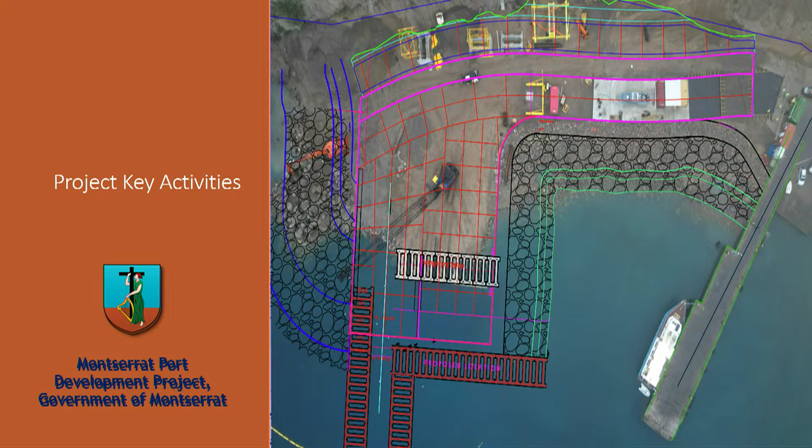Our next photograph highlights the ongoing construction, and you can see there is already a lot of work done in completing the causeway and the road access. And this is an aerial shot where you can see the permanent caissons that are making the formation for the RoRo ramp or the roll-on and roll-off facility that is being formed at the moment. And then to the seaward side, there is the construction of the coastal protection.

I just want to speak a bit on the caissons. These are large concrete blocks. On the table here, there are some 3D models that have been printed, so later on after the meeting, you can have a look. It gives a better idea as to what actually is being constructed. But this is an underwater photograph that highlights the caissons being put in place to form the RoRo ramp.

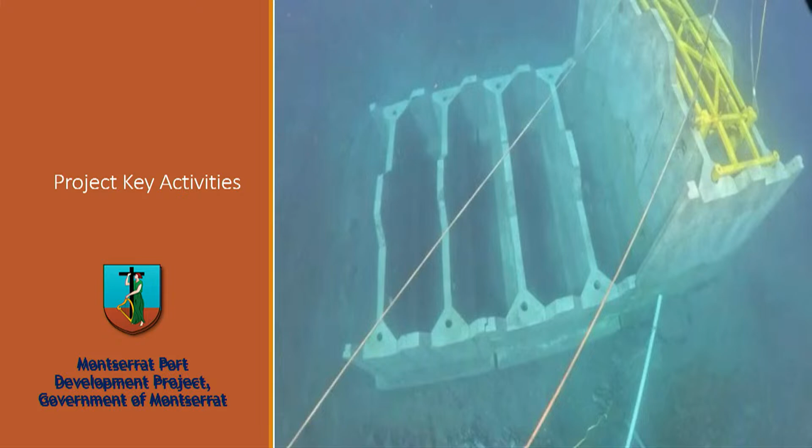Caissons are being constructed, they are being precast at the Piper's Pond facility. And to date, the contractor have completed just about 80 caissons. They have reported they have completed the required amount to construct the RoRo ramp, but the total requirement is about 324 thereabout, plus what is required for the Dolphin. The Dolphin would take on a different configuration, but will be done with the precast caissons as well.

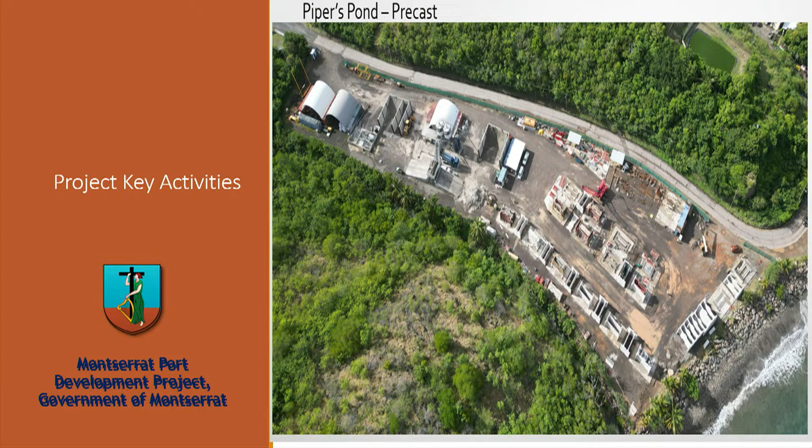So the photograph highlights, and I know a lot of us been driving along the Piper's Pond in the Carr's Bay Little Bay area, and you can see through the fence the construction that is ongoing. Next, I'm gonna show a video highlighting how the caissons are removed from their base after being precast. And usually it should take about 3 days for them to remove formwork and then storing the caissons.

The caissons are built on what is referred to as a kicker, and it takes the various trapezoidal or triangular shape that allows the caissons to fit together. So in my hand, I have the 3D printed models, and if you notice, there's a trapezoidal shape, and so the formworks are prepared so that each caisson can have that. These are called keys that allow the caissons to fit together in a manner that they would be very stable when they're fitted together.

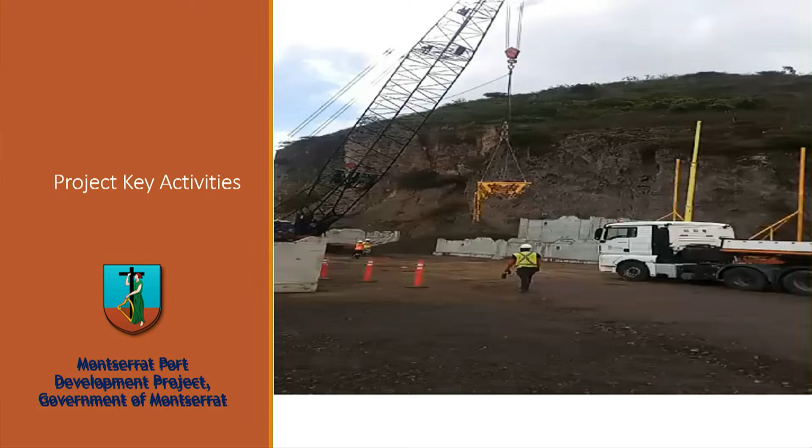So there you see the crane would have lifted the caisson from off its platform, and it has the ideal shape that is required for construction. The caissons are then transported out to the main construction area onto where the pier is being constructed. This is using a lorry, and some of us may have had the opportunity of seeing these being transported, and I just wanted to highlight this in terms of the whole traffic management process that is in place.

Usually, once they're transporting these around from Piper's Pond into Little Bay, traffic is diverted up to the cultural center and down to the port, or from the port up to the cultural center. While the lorries are going through the port gate, there is always someone in place to control the traffic so that these are transported in a safe manner and we don't have any incidents. So far, it's been working pretty well, and we have been highlighting this in our media so that our folks are aware of what is happening.

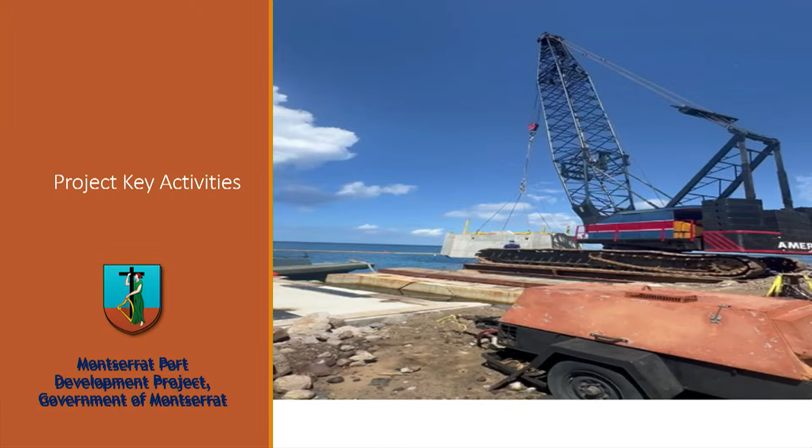Once the caissons have been transported out to the causeway or the main construction site, the main crane, the bigger size crane, is used to put them in place, and you would have seen in the underwater photograph previously where these are being placed underwater. There are numerous other machinery which allows them to be placed accurately, including the surveying instruments. You would see some large towers. Because it's underwater, they're using these large towers with the prism at the top that would allow them to place the caissons correctly, ensure that they're level and that they are aligned as they should.

There's some other machinery which is called the stone spreader, and it's similar to a road paver, and it is used to place the bedding material which the caissons are being laid on, and compact that material. All of this machinery operates underwater.

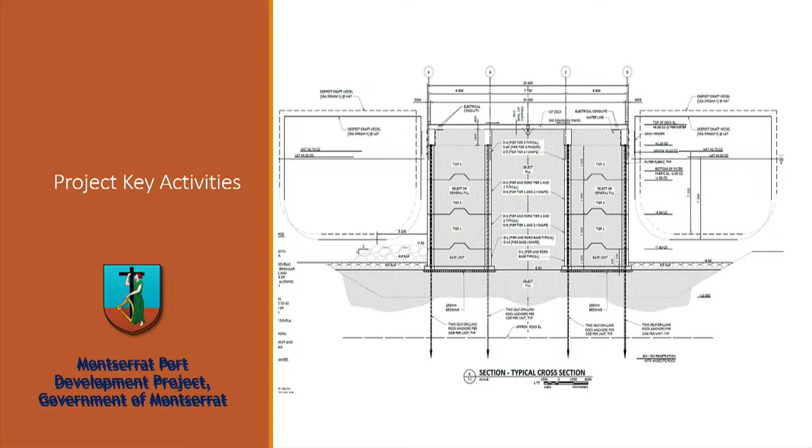Previously, we have had questions as to how we are ensuring that the caissons are stable and well in place. As part of the designs, the designers have been using what we call the rock anchors, which are some very large steel bars drilled down into the seabed, just over 5 meters, I think, thereabout. This is about 15 feet or so, which is part of stabilizing the entire structure. Apart from that, the caissons are being filled with materials to ensure that they don't move under the sea conditions, and we know what sort of sea conditions we are dealing with.

So you can see the lines. These represent the rock anchors, and they go from the seafloor right up into the caissons. When they're precast, each caisson is constructed with a circular void, which allows us to embed those rock anchors, and it's also filled with a grout material that hardens and makes the rock anchors become one with the caissons.

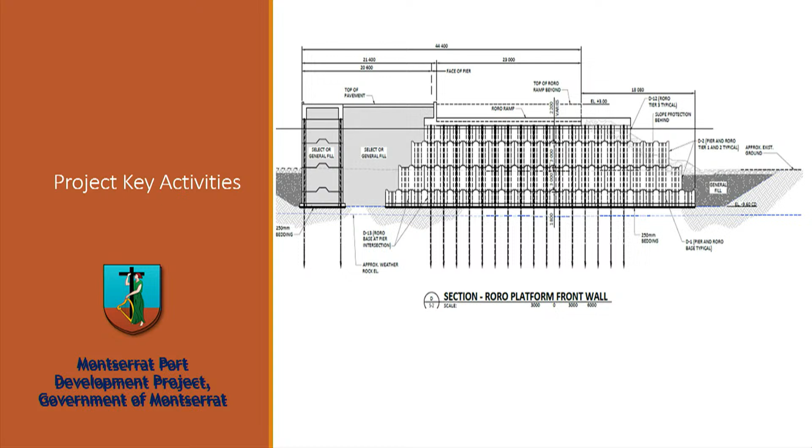Just to give you an idea of what those steel bars look like, and this is just a sample, it's not the full length. They actually operate with couplings where they're joined together. The machinery is also on island, the drill rig, which allows the placing of these steel rods into the seafloor. So that machinery is on island, is operational, and soon enough, along with those caissons that have already been placed, they'll be putting in the rock anchors.

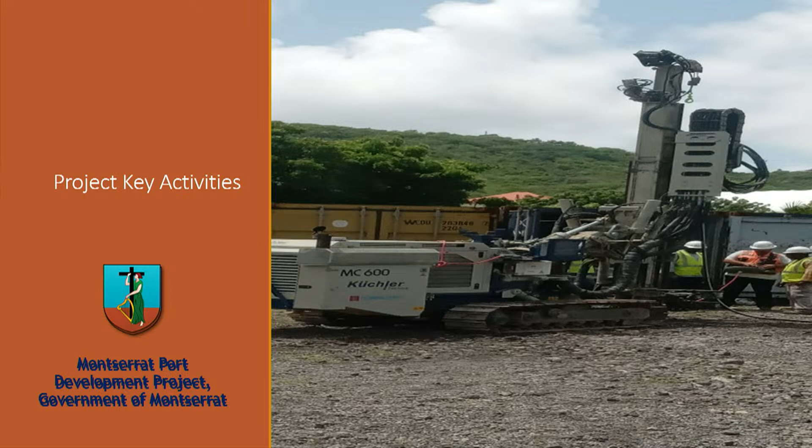Just to give you an idea about the diameter of these, they're about 3 inches in diameter, and each caisson is designed to accommodate at least 4 of these, 2 on either side, which adds to the whole stability of the structure. I mentioned previously about the drill rig, and you have a photograph there of what it looks like. And it's in operation. I know they have been testing the equipment as well.

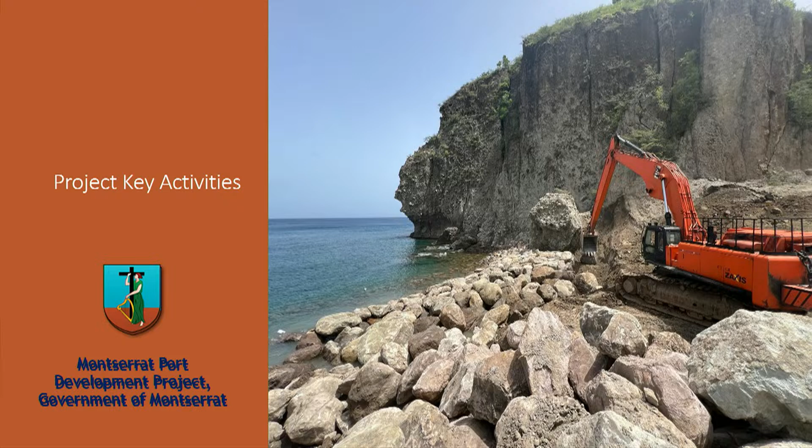Earlier I mentioned about the seaward coastal protection. This is what we term as a dynamic revetment design. So you won't see the concrete slabs as you would have seen in other designs, but this entire structure is about 15 meters in width seawards, and it comes with the required slope, and also it's been built for a height of plus 5 meters above the finished ground level.

So it also caters for overtopping as well where the main pier meets the land side, which is where the structure is most vulnerable. So they have ensured that the structure is well secured, and the roadway would be well protected as well.

Coming off a bit of the infrastructure works, I want to speak to the softer side of the project where we have had much success, speaking to the project safeguards. From the environmental side of things, we have transplanted the corals. We have moved them from within the main construction area, and they have been replanted on the Rendezvous Bluff, as well as the southern bluff, which is referred to as the Carsby Bluff as well.

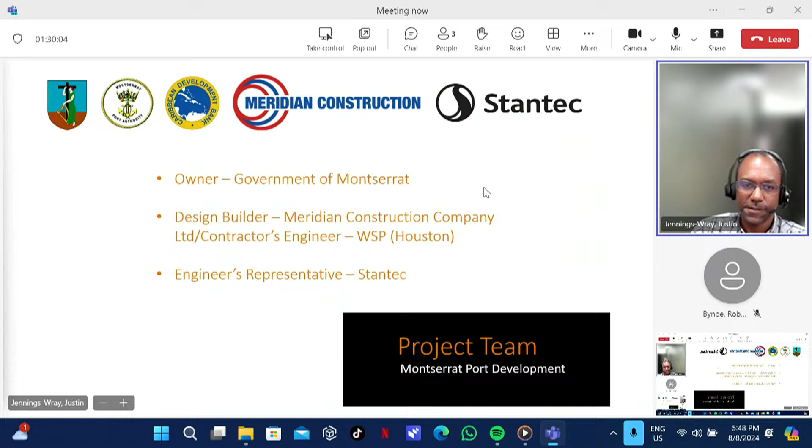In terms of Stantec's role, we are the technical representative of the government of Montserrat. As mentioned, we provided a preliminary design of the port layout facility, taking into consideration specific requirements that were set by the Port of Montserrat. We provided oversight of the design and the review of the designs that were produced by the contractor. So that was a process that occurred.

Stantec also did many of the preliminary studies, including site investigation, geotechnical, some environmental, and social and gender studies, and so forth, which helped to provide the information, especially on the environmental side, that is being used for the management plans that were described by Mr. Patterson, such as monitoring the water quality, the bats, birds, turtles, coral relocation, and so forth.

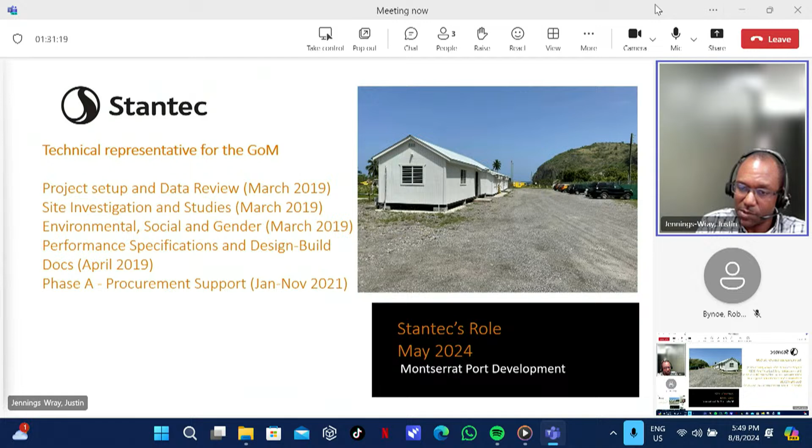Stantec also produced the bidding documents which the client used to reach out to contractors for bids, and also helped the client in the evaluation of the bids that led to the award of the contractor Meridian. During the construction phase, it's an important phase, that's where we are right now. The focus here is making sure that the completion of the project is done in accordance with the final approved designs and specifications as provided by the contractor's engineer.

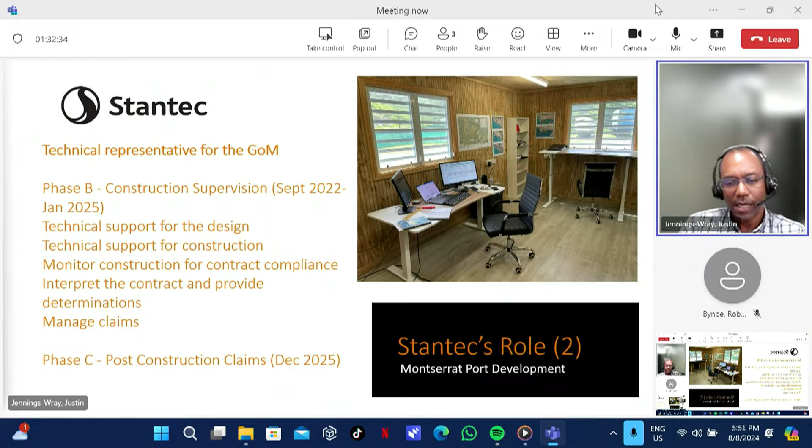If there are design changes, then part of the process is for Stantec to review and approve and so forth. In addition to that, we are monitoring the construction. So we're keeping an eye on quality and the specifications, making sure that they're compliant. We're assisting with the management of the claims for payment and processing of payment to the contractor on a monthly basis, amongst other contractual tasks. There are all kinds of issues that come up from time to time contractually, and we assist the project and the government in managing or interpreting those issues.

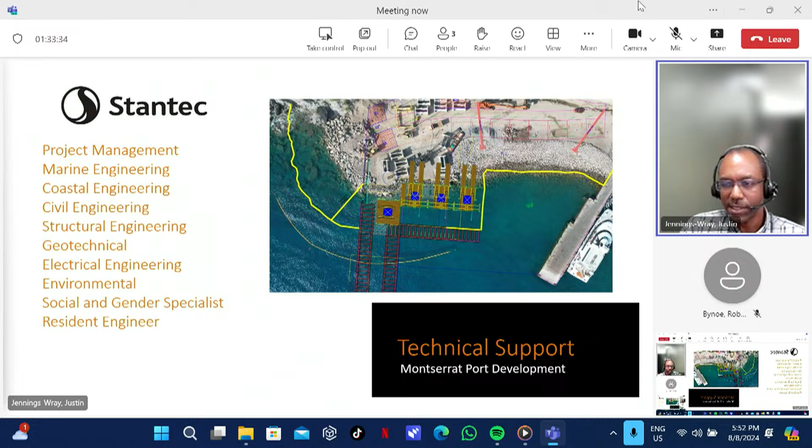So the Stantec team is quite massive. We've got several key experts, subject matter experts, who are basically working remotely, more so out of our ports team out of Vancouver. They're marine engineers and coastal engineers and structural engineers, geotechnical engineers, electrical engineers for the lighting and so forth, environmental engineers and the social and gender specialists who are providing oversight of the contractor's implementation of the environmental and social and gender safeguards. And then there's a resident engineer and engineer's assistants who are on the ground keeping an eye on things.

Environmentally, as was mentioned before, there are key issues: coral relocation, keeping an eye on the birds, the bats, and other mammals. There's biosecurity, which has to do with putting in safeguards to prevent pests coming in on materials, particularly aggregates and sands, which are brought into the island for the project. And on the social and gender side, there are town hall meetings and community engagement. So we're providing oversight of the contractors' implementation of those two plans, environmental and social and gender management plans.

We'll not go into any detail here on the design. I think Mr. Patterson did a great job of that. But just to say that the design criteria for the pier focused on a 187 meter total length cruise ship, which is a Windsurf, shown here, and a 120 meter total length container ship. There's a roll-on, roll-off ramp, which assists with the offloading and loading of vehicle and wheeled cargo. There was slope stabilization work that was done.

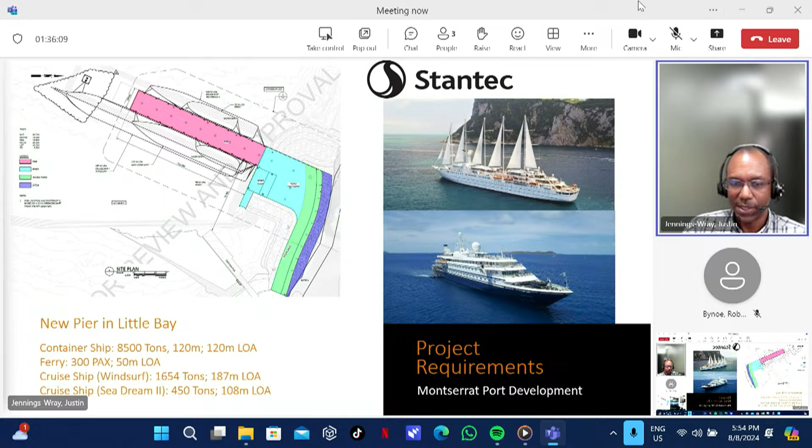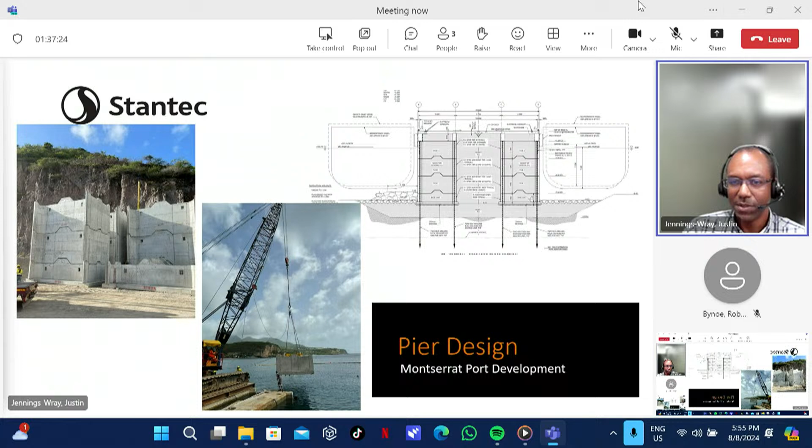The pier design was described already by Mr. Patterson. The only addition I would say is that it's a stacked modular reinforced concrete caisson system where additional weight is added by infilling the cavities with fill, and then there are the rock anchors which Mr. Patterson mentioned. So there's a base unit and three tiers that elevate the structure out of the water, and then the top deck is just a reinforced concrete slab as you'd have in your private home, of course built to a different level of structural integrity.

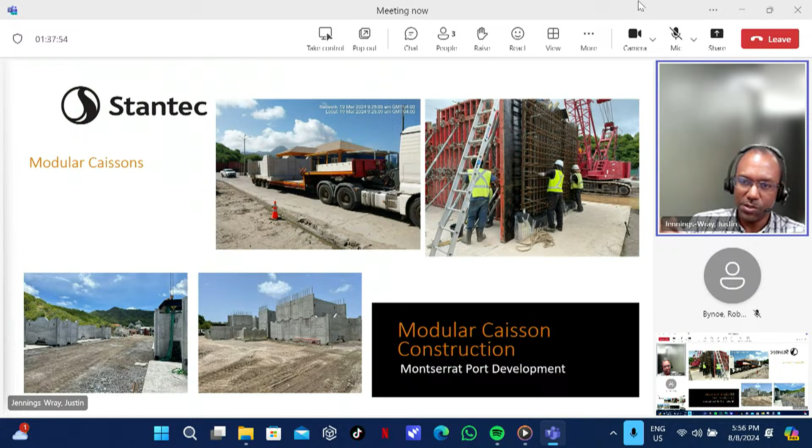Just a couple of photos here. I will not go into this. The video showing how the units are transported was quite good. The picture here is really just meant to show that these units are under construction. What is typically done is that you use steel and formwork to form the box, so to speak, and you pour the concrete inside.

In terms of schedule, the original commencement date was June 9th, as mentioned. The original completion date was January the 4th, 2024, but this has been delayed. The current slated projection coming from the contractor is the 25th of February, 2025.

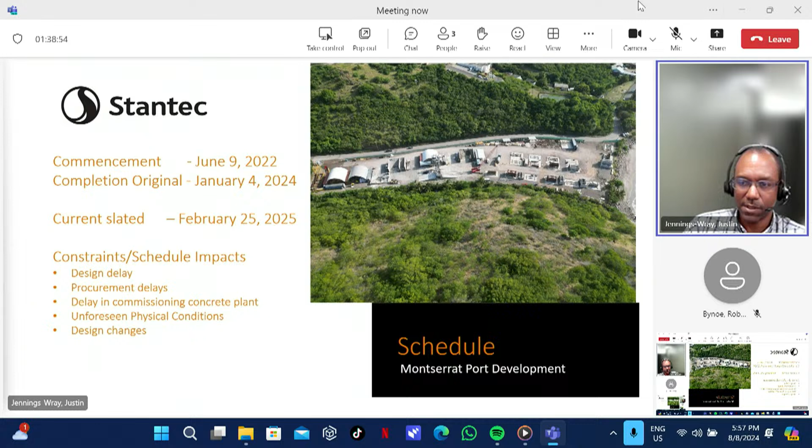There are several reasons for this, some of them having to do with delays with designs and looking at various options and so forth. There are lots of materials and components and equipment that had to be procured, and that was delayed. There was a delay in the commissioning of the concrete plant, and there were some unforeseen circumstances, physical conditions, that is, in the nearshore that resulted in the need for some design changes. So those reasons and others are why the project is delayed, but it is ongoing and progressing fairly well.

So this is an aerial photo that you saw before. In terms of progress to date, there have been temporary caissons which have been placed just at the near shore here. And these are really to facilitate the crane being able to get out into the marine environment, to lay these other caissons, which are to be laid. As mentioned, they're in the region of 80 out of 321 that have been cast to date. There are 3 permanent ones in the water, but there are an additional 6.

And these here are above sea level. The permanent ones, which I'm describing, and the temporary ones that I'm talking about, are within the sea, below sea level. And 3 of those are permanent. The others are there to kind of protect the works. One doesn't want to put these works down and then have a storm surge pass through and destabilize. So until the caissons can be placed and filled and the anchors put in, there's some temporary works that are done to protect the works that are being constructed.

The coastal protection, which Mr. Patterson mentioned, is ongoing. It's around 50%, and these are the protection on the seaward side and in the leeward, or in the basin area here. Quite a bit of dredging has been done, and the concrete roadway of the causeway leading to the pier structure has been poured to some extent. It is being poured in alternating panels, and 6 of them have been poured. We have a couple of pictures to show.

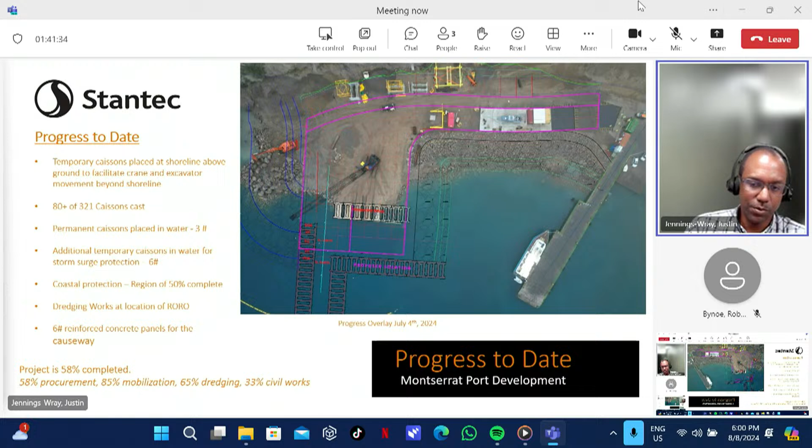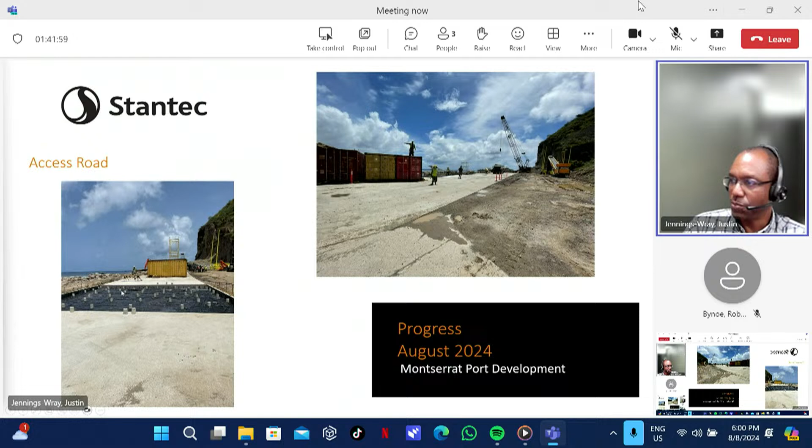So here, just a couple of pictures. We have a picture here showing the construction of the causeway. These are reinforced concrete slabs, and you see they're being poured in alternate bays. And here you see the contractor getting ready to pour another set. Here again, we have the caissons. If you look closely here, you can actually see one which is underwater.

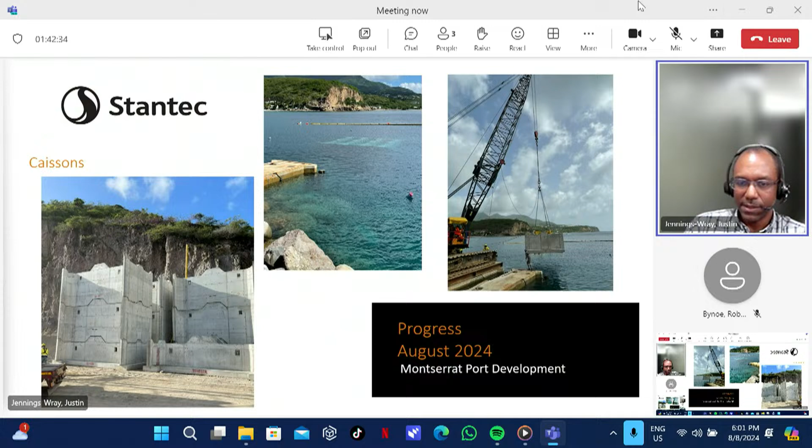Okay, the silt curtain, which is meant to protect the far reaches of the sea in terms of debris and silt that might be agitated as the contractor works, you can see is in place, and just a picture here showing how a base unit is being laid in the sea. The seaward protection, this is what it looks like up close. Basically a boulder pack, which is set there, which is meant to absorb the energy of the waves and to protect the coastline.

I would not go into detail here because Mr. Patterson touched on this area already, but only to say that there is also turtle monitoring, and so there's daily surveillance. And in June, there were actually 2 turtles observed where the water quality monitoring was being done. I spoke a little bit before about the biosecurity, which involves the use of bait and disinfectants to make sure that there are no pests in the aggregate and sands and so forth, which are being imported into the country.

Mr. Patterson spoke about the bat monitoring and the use of mist netting in order to capture and examine and release the bats and so forth. There's also bird monitoring. There are daily inspections and sweeps, and based on reports, there's been no nesting or injured birds observed. For marine water quality, there's a multi-parameter meter piece of equipment that is being used to routinely test the quality of the water to ensure that it meets the ambient standards.

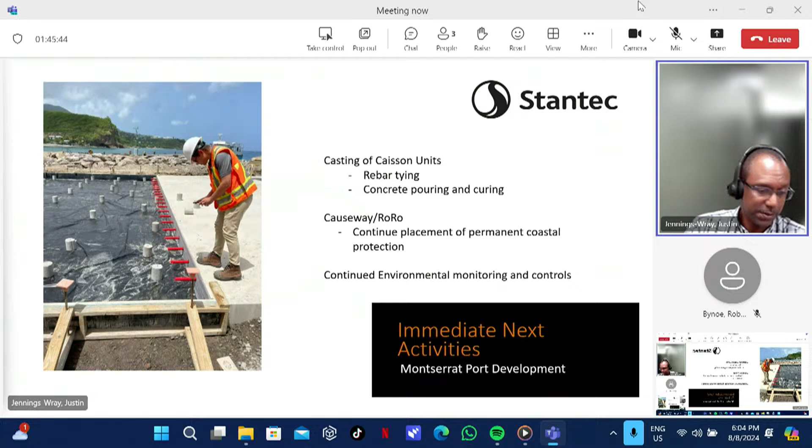Right, so that brings me to the end of the Stantec presentation. Just an interesting figure that you can see to the left here. This is the bat cave that Mr. Patterson was talking about.

Okay, so as a company, Stantec, we are extremely pleased and committed to work with the government of Montserrat and the people of Montserrat to ensure that this project is delivered to the highest quality, so that you have a pier that will survive the test of time and elements. Thank you.